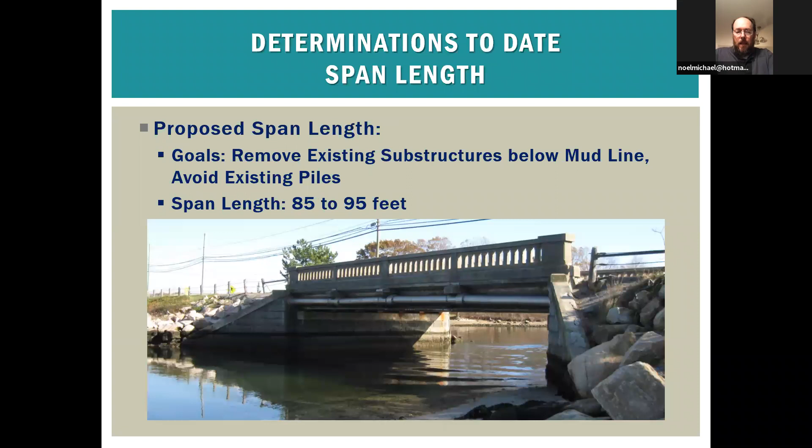So far we've determined the span length of the bridge. We said we want to remove the entire existing bridge down below the mud line, and to span over that, it's going to take a span of about 85 to 95 feet.

Just to rehash why we want to span over that whole existing bridge - down below the abutment, what you can't see is a field of wood piles, timber piles, basically like telephone poles that were driven into the ground to support this bridge when it was constructed. Those are probably still intact and in good shape down below the mud line, and would make it very difficult for us to build our proposed substructures through that.

So we're going to build behind the existing abutments - we'll cut those off and remove the existing abutments in their entirety. Those will be buried below the mud line, and you'll never see them again.

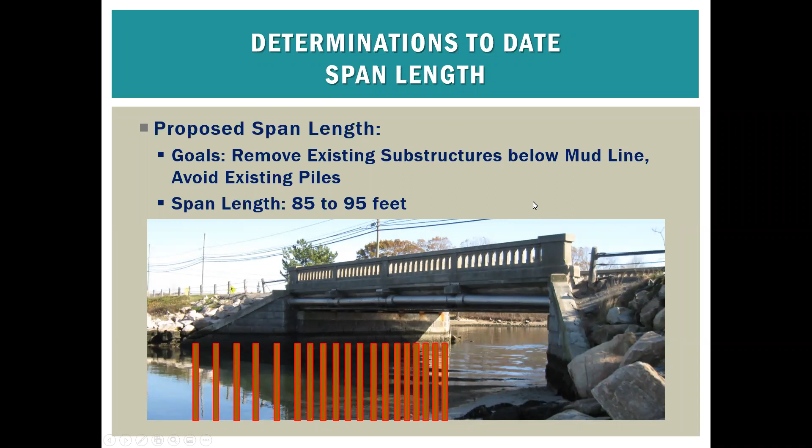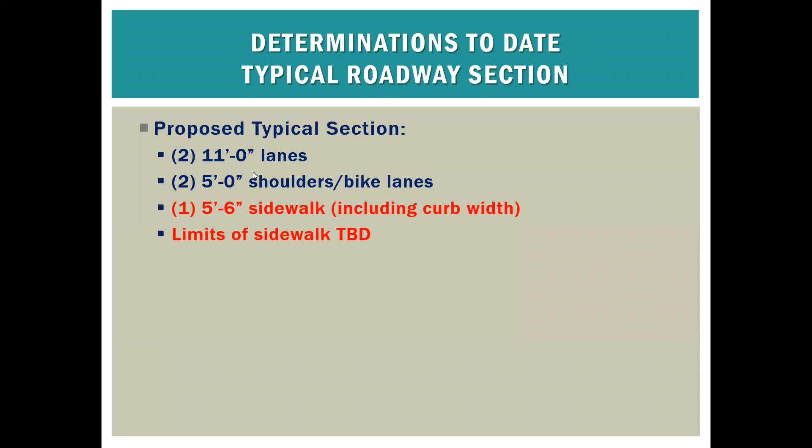For the profile, we have the goal of achieving 1 foot of freeboard at the 100-year flood, which is basically keeping the roadway dry at the 100-year flood. As we discussed during the last meeting, that does require a fair amount of fill along the causeway.

We talked about the properties most impacted by that fill, especially 991 and 981 Groton Long Point Road, where the fill approaches 3 feet. So it's a substantial impact to those property owners.

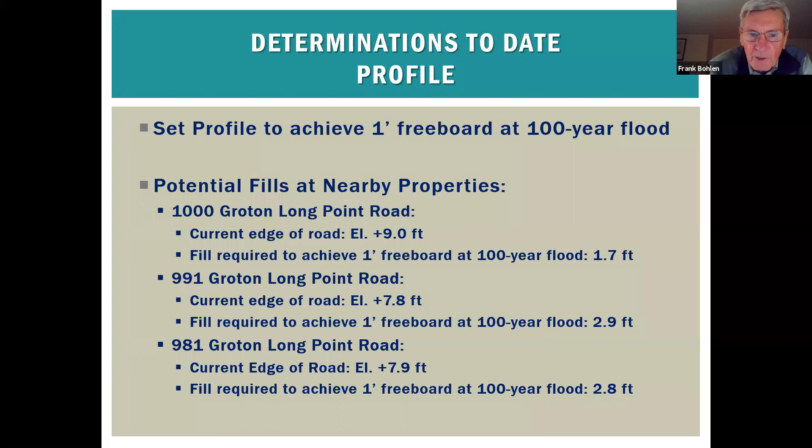Okay, now wait a minute, just give me a chance to read it. Sure. So if we go at 1,000 Groton Long Point, which way are we going? 1,000 is to the west. Let me go into the internet here for a minute. Are you still seeing my screen? Yeah, I see it. So 1,000 Groton Long Point is the first property to the southwest here, and 991 and 981 are the closest properties to the northwest.

Good, so let's take a look back at that other slide. So at 1,000, you've got a current edge of road elevation of about 9 feet, and you're going to go up a foot, 1.7, right? And you're going up 3 feet at 991, which is the red roof house. And then about 3 feet at the next one. So you're coming up 3 feet, 3 feet, and 2 feet. Okay, good, thanks.

So we've already kind of gone through this - these are the impacts without a sidewalk in front of these residences.

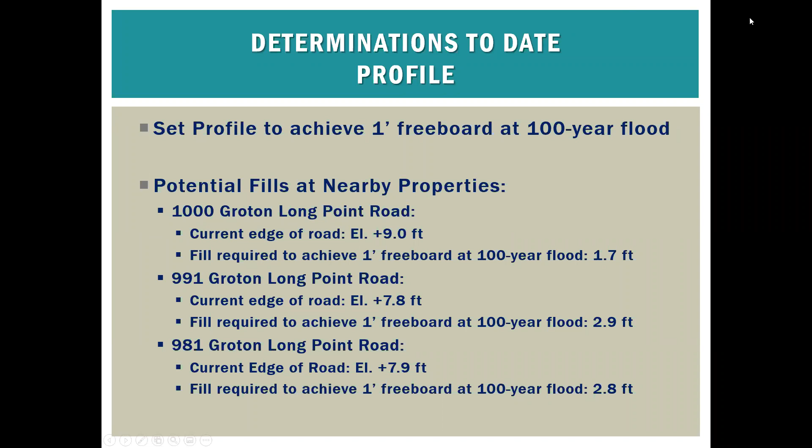So getting into the sidewalk - as Greg and I discussed, this meeting will be a little different tonight. We're intending this to be an open forum and a brainstorming session for what we would hope to get out of the sidewalk.

First I want to hear who is in favor of having a sidewalk or incorporating a sidewalk in the project, and then what those individuals would like to get out of the sidewalk - whether it's connectivity from one point to another, is it to get to the bridge for a viewpoint, or are there other reasons to have the sidewalk?

And then where would the sidewalk go - north side, south side? If right of way was not an issue, what would be the ideal location for the sidewalk? What would the eastern and western limits be? And then after this, we'll talk about what the right of way implications are.

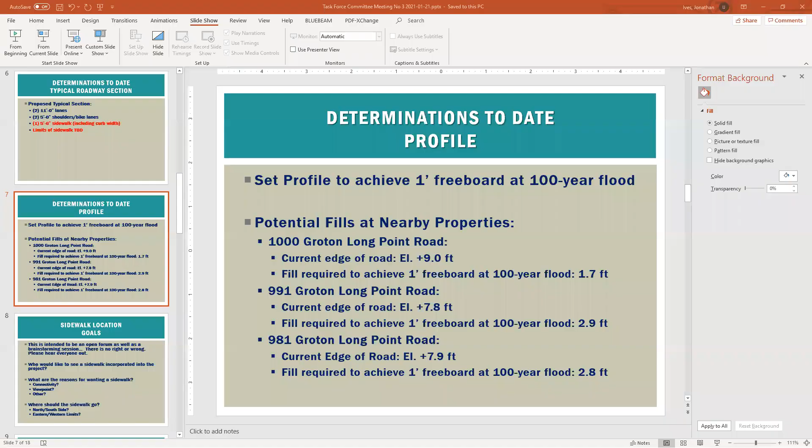Would anyone like to offer an opinion on that? Now, I can go back to the aerial view. This is just the town GIS website. We also have Google at our disposal here.

Are there sidewalks on Groton Long Point Road, on East Shore Avenue? There's a sidewalk along the west side of East Shore Ave. That was on the east side, John. Or is it the west side? West side, the far side of East Shore Ave has the sidewalk. You're right.

I think it'd be a great idea to have the sidewalk right from that corner all the way headed east to Esker Point. That's on the south side of the road. It's the only thing that makes sense if you're gonna have a sidewalk. Yeah, that'd be great for access for everybody.

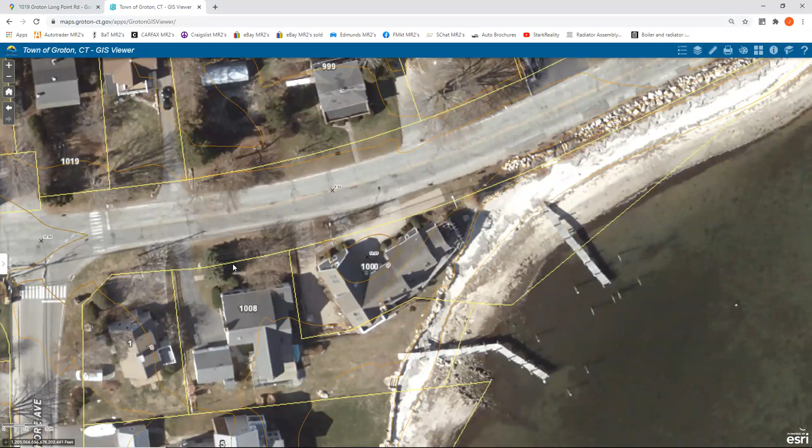Are there any sidewalks on the fisherman side currently? No, no. So the sidewalks stop well before the bridge currently. There is no sidewalk on the east side or the west side. There are no sidewalks along Groton Long Point Road. That's right.

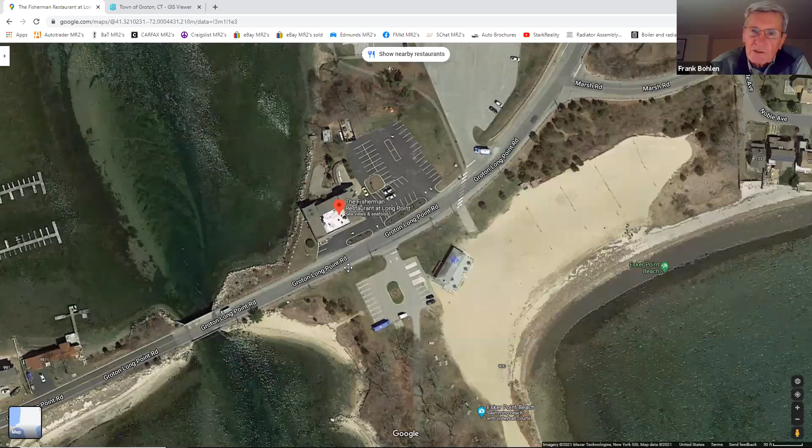And where do they stop? At the Esker Point parking entrance? There are no sidewalks. Well, there are sidewalks up the road. They just stop near 215, or they stop at the entrance to Esker Point Beach currently, correct? No. They walk on shoulders.

So the placing of a bridge could have a sidewalk built in that area, which doesn't have any existing sidewalks. Yeah, it was built with the potential to add a sidewalk on either side, but there is no concrete or paved sidewalk there now.

So as you head toward Groton Long Point, there's a crosswalk from the parking lot over to the beach, but no sidewalk on either side of the road. And then as you continue along Groton Long Point Road, past the restaurant and over the bridge toward Groton Long Point, we have very narrow shoulders now and no sidewalk. So there's no sidewalk until you get to this East Shore Ave.

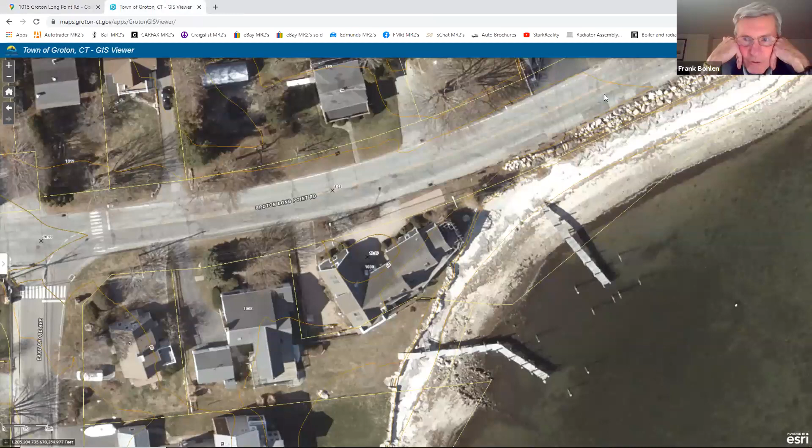You're proposing two 11-foot lanes and two 5-foot shoulders. Yes, so you've got 22, 32 of blacktop, more or less. And what does that look like? That's wider than this guy right now, right? I could look, I measured it, but it's a little bit wider than the existing bridge.

Okay, so I guess two things. If you're talking about a sidewalk, width is what? Another 6 feet? It's about 6 feet. Yeah. Well, we have to think about it going 6 feet into the adjoining property somewhere in there.

But what are the cost implications? Cost implications are, basically, I'd look at it as square foot cost. As you increase width, you're increasing cost approximately proportionately, as you're building out the causeway. Could be even more, I'm thinking about the sidewalk now. If I didn't do the sidewalk, am I $1 million to the good, $500,000 to the good?

Okay, so we've heard that there's some interest in having the sidewalk along the south edge of the road. We know there is going to be some cost implication if we do that. I will offer up that we have received feedback from the property owner at 1000 Groton Long Point Road, who is not in favor of having a sidewalk along the front of his property - just to get that out there.

What about, did you ask him about roadway elevation? We haven't engaged the property owners to date, but this property owner reached out with some feedback. I think his thought was that all along 215, or the main road there, the highway or the path that you showed earlier was on the other side of the road, so why would we change it to that side? I think that was his train of thought.

Yeah, I think it totally makes sense to have it on the south side, and I don't think the opinion of one homeowner - it's not like we're going to have it on his property - I don't see why that would matter. He may not be there year round to keep it snow clear or something, huh? Yeah, well...

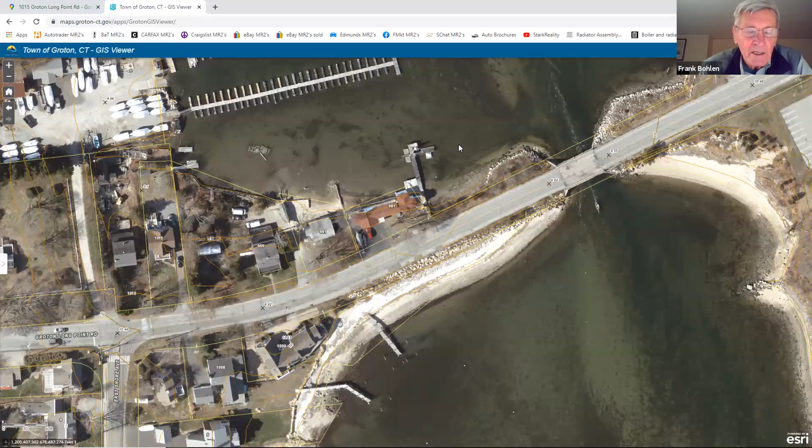Yeah, otherwise you're going to need a boat. Exactly. Well, it does. It's a public safety issue for sure. If that is even on the table, one thought I had was for the owner at 1,000 - he's concerned about some liability on the sidewalk, and we're joking about cleaning the snow, but that's really then taken care of because it's in Groton Long Point Association's hands.

That's correct. The land in front of those three houses, certainly, I don't think there's any dispute that that's Groton Long Point land. And if there was a sidewalk there, Groton Long Point would support that sidewalk because it's on Groton Long Point land - Groton Long Point would be responsible for that as part of its domain, handling of the sidewalks. Right.

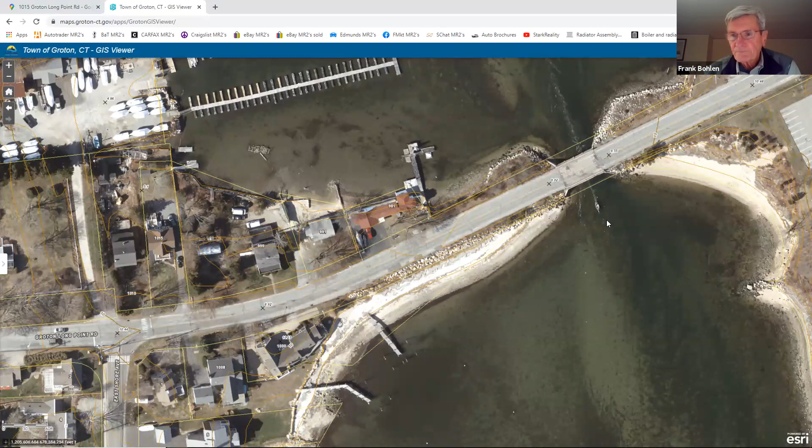Interesting. Okay, is there any counterpoint to discuss then? And are there any opinions otherwise as to what the preferred extents of the sidewalk would be?

So do most people agree that it should be on the south side? Yes. Okay. Do most people agree that it should go from Esker Point to East Shore Avenue? Yeah, if you're going to build it. Okay, all right, well that's good.

What about - this is David - I just want to make it clear that I'm not in agreement with that. I would need to get the support of members of the Groton Long Point Association for those matters, anything beyond the bridge.

That actually brings a good question to mind. If there was an interest in having the sidewalk run from Groton Point out through the Groton Long Point Association area, say East Shore Ave, out to the bridge, why would it not continue beyond that? What would be the point of having the sidewalk out to the bridge where it stops at the bridge?

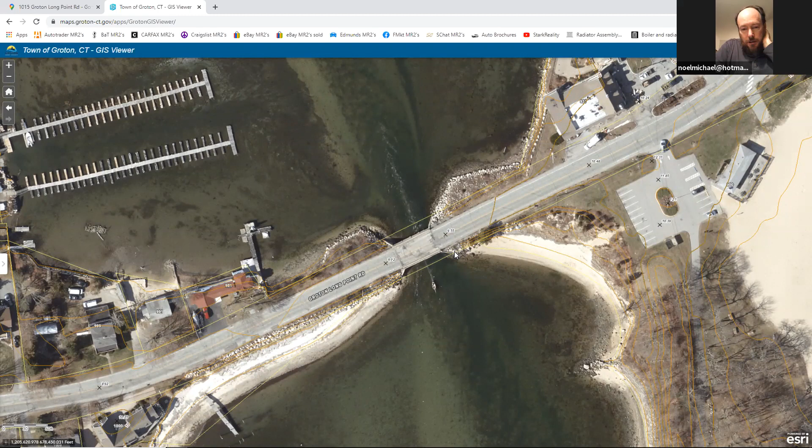Well, that was going to be one of my questions as well - why are we building a sidewalk with nowhere to get to that sidewalk? Right, so what is the basic reason for the sidewalk? Is it to connect the beach?

Hey, if any of you guys go down there at all during the day, there are hundreds of people that walk along that road with like a 2-foot shoulder on the north side. There's a lot of people that walk on that, and we definitely need a sidewalk. And we run into them on the bikes. Absolutely, oh yeah, they're there regularly.

Are you referring to a sidewalk from 215 to the bridge? That area where there's no sidewalk currently? No, the whole length all the way to East Shore. Understand, but I think the question was, what's the plan for the sidewalk from 215 to the bridge? Or is this, because it sounds like we're just addressing or discussing from the bridge to Groton Point?

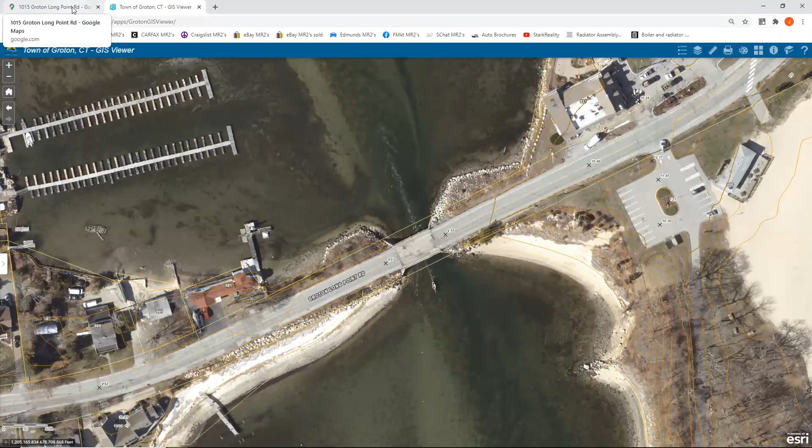I think it should go from the parking lot at Esker Point Beach all the way across the bridge to Eastern Point, to East Shore Ave. No. And what would be the cost of that?

That's what I asked. And what would be the cost? Around $1 million. We're offering that up as being in the ballpark. That's just a guess, right? Right, yeah.

Could be less. And with the overall scope of the bridge, if the town's only paying 20%, I think it's a worthwhile investment.

Can we get some formal guidance on that? Because in my past, I've found that extensions of a project are not deemed as the same reimbursable rate as the initial project. So I would want to make sure that this group, as well as any future group, confirms that the sidewalk we're discussing from the parking area to the bridge is 80%, as well as beyond the bridge in Groton Long Point is 80% reimbursable as well.

Yes, we can consult with the federal local bridge program and confirm the eligibility of that. In my experience, generally, as long as something like a sidewalk matches your roadway limits, it would be considered eligible for funding. But we can certainly confirm that. That'd be good to have for next meeting.

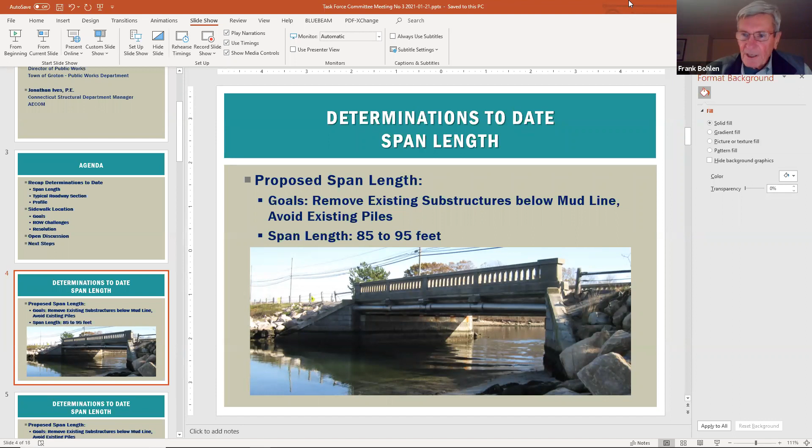Could there be grading done under the project, I guess? Yeah, well, I think I recall that conversation. I think it more had to do with what you were talking about in terms of the pile structure. We heard tonight that they're going to be building outside that pile structure, right and left of it, and cutting that pile structure off at the mud line, the existing mud line. That would complicate the dredging in there anyway. But the problem isn't in the channel—there's plenty of water under the bridge. The under-bridge water depths are fine. It's to the north and south that you get into trouble.

I think you can actually kind of see that in the aerial. There's so much water coming through this opening here. If you go out there when the tides are coming in or going out, that water is really rushing through there—it's moving now. There's probably also some sediment buildup outside of that. Yeah, typical.

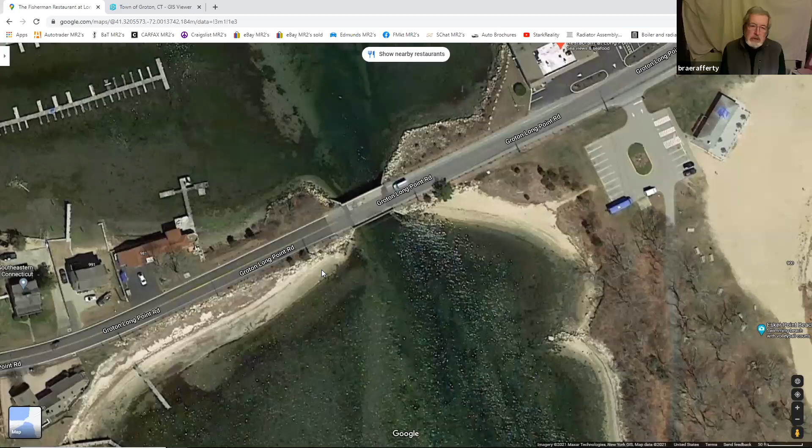Thank you. What about the riprap along the intertidal zone coming up to the road structure? Is that just going to be added to, or is all that going to be removed and new material brought in? Our hydraulic engineer has a designed riprap section that's shown in the earlier studies. It includes a specific size of riprap needed based on the wave heights shown in the FEMA studies.

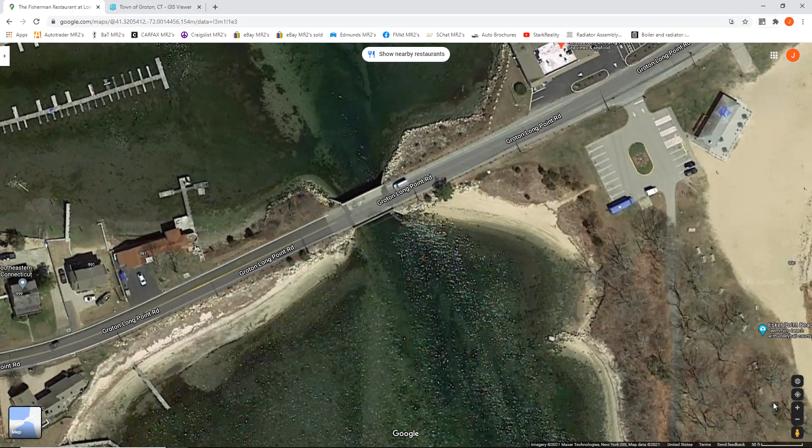Would you remove what's out there? I think some of that depends on the roadway and sidewalk limits. If we're building out the south edge of road to incorporate that sidewalk, you are kind of pushing that south a little bit. If you look at the street view, you get an idea—as you get close to the bridge, the south edge is steep and kind of hugs the south edge of road.

We're talking about building a sidewalk south of this, so yeah, we are pushing that toward the sound. Anything else?

Nothing here. Okay, so let's see. All right. So moving forward, I think we're ready to move into design.

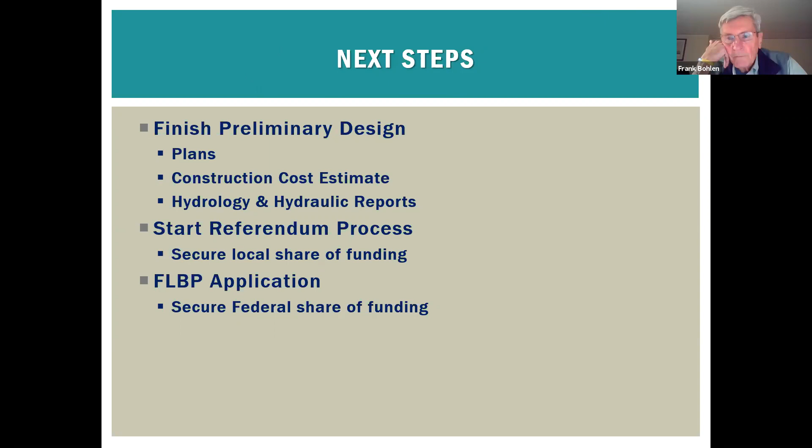Okay, are there any utilities across that bridge, water or sewer? There are. Sewer is on the north side of the bridge—it goes underneath the water. That's correct. We have a backup water supply going over the bridge. The water line is on the north side of the bridge; it hangs off the bridge. You can't see it in the photo, but it's outside of the bridge structure, just kind of tucked under.

Sewer goes around the bridge—there's a siphon under the channel. Sewer generally runs down the middle of the road, but it skirts around the outside of the bridge to the north.

And you have the utilities along the south, the overhead utilities along the south edge of road. What was that pipe hanging on the south side of the bridge? It was on the north side. I thought there was one shown on the south side in the picture. Let me look back at the original slide, the photo... right there, there it is. I think that's the north side of the bridge. Oh, okay, you're right. That is the north side. See the telephone poles.

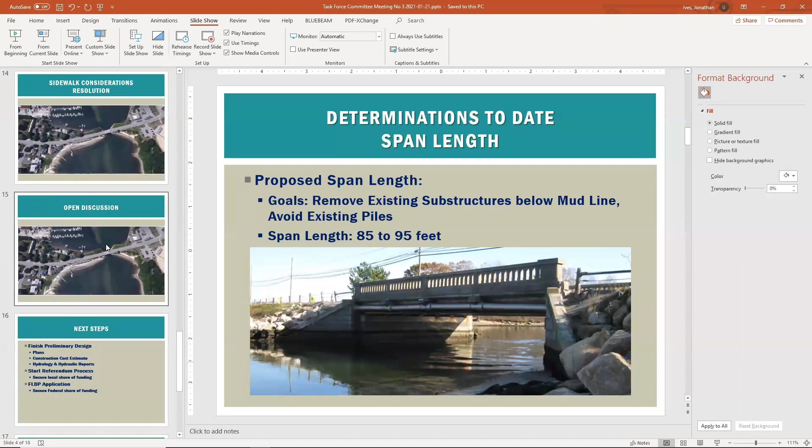So do we intend to meet again next month? And what would we like to discuss at that point? I'd like to hear, I hope over the next month you can really get together with the owners.

And that picture got a little more complicated when I heard this story about Groton Long Point tonight. But the landowners on either side of 1099 and 991, about the effects of the roadway increase in elevation, I think we heard last time that that was a potential thorn. You could get into some litigation over takings and costs over takings. And we'd certainly like to have that resolved.

And I know we've discussed the three property owners. There's no issue with the other property owners near there, no concern for them, correct? Well, we discussed the ones most impacted in our meetings here, which are closest to the bridge. But everyone, I guess, is impacted to some extent through the project. I guess I'm just wondering if we're going to reach out to those three, does it make sense to reach out to the other two or four, since they may want to be informed as well? Absolutely.

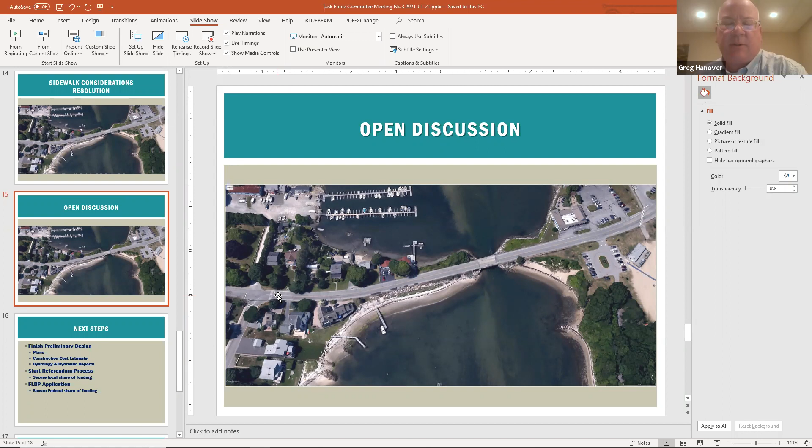Okay John, you and I can get together and see what you can get for me that we can send or meet with these folks, to get some preliminary feedback. And that will take some design development, so we'll work together on a time frame for that, whether we meet a month from now or whether we push it so we can get some further design development and have a chance to talk to those people. It may make sense to push that out just a little bit.

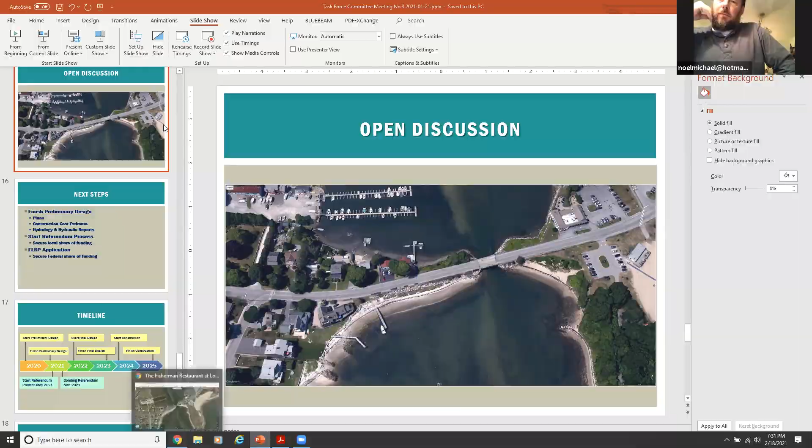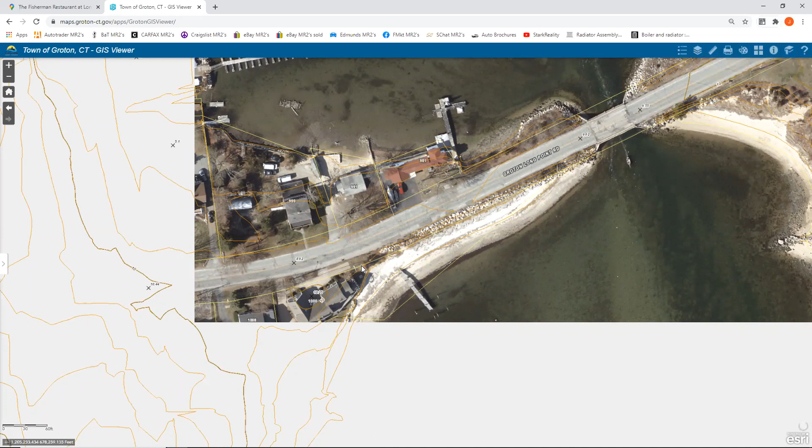Hey, are there currently markings that show where the roadway ends on these adjacent property owners' property? If somebody really can't complain too much about a sidewalk if it's not on their property, I wouldn't think. Well, everyone has access to the town GIS website. Oh yeah, that's true. There are property lines and street lines shown on that website, so you don't even really need engineering plans to understand that. The issue is much more elevation - you can't see from this the limits of grading from the proposed project.

Yeah, that's the biggest impact we've talked about. Isn't Fort Hill something like 14%, Greg? No, it's only 9%. You said 20%, John. Yeah, it's very steep there to make that grade increase happen. And it may be too much. It certainly is feasible to incorporate some improvement.

That was our target, to have that foot of freeboard for the 100-year flood. But again, I think people are really hung up on the 100-year flood because they think if this is something that happens once every 100 years, chances are it's not going to happen in my lifetime. That's not really the case. The 100-year flood has a 1% chance of happening every year. And the 50-year flood here is substantially lower, and that's a 2% chance that flood happens every year. So there is a substantial cost associated with raising the roadway above the 100-year flood level.

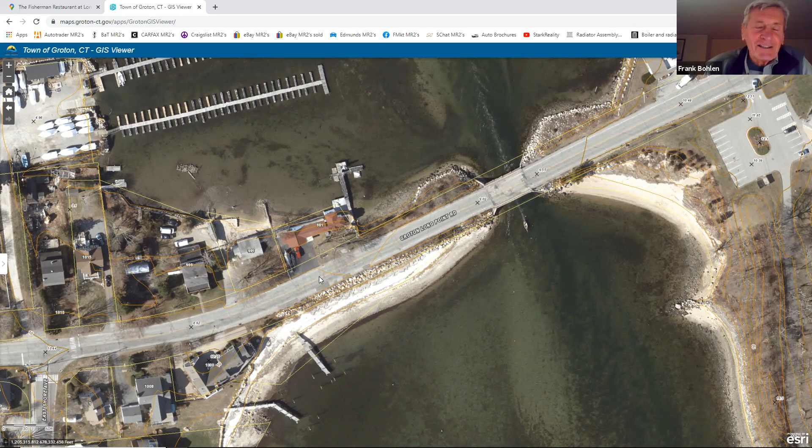Yeah, let's explore the issue. I think you have the thing in front of you, because we could get into some discussions of that. Someone might argue - now mind you, I'm coming from a resilience standpoint, so understand how kind this is - it doesn't make any sense at all to raise the bridge to the 100-year flood level, because at that point, Groton Long Point is going to be gone.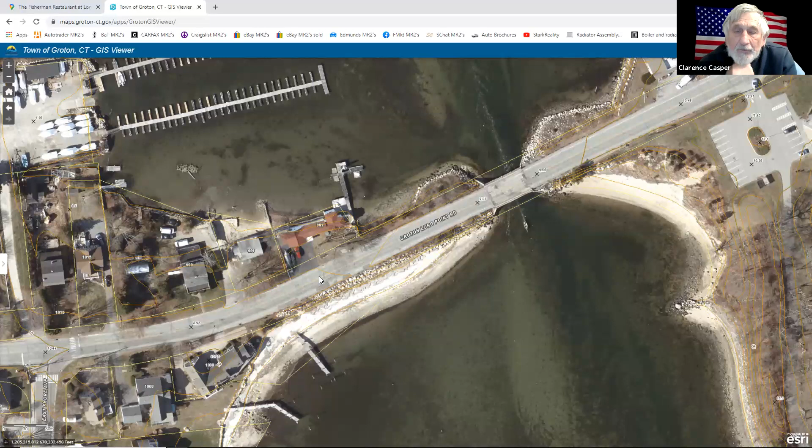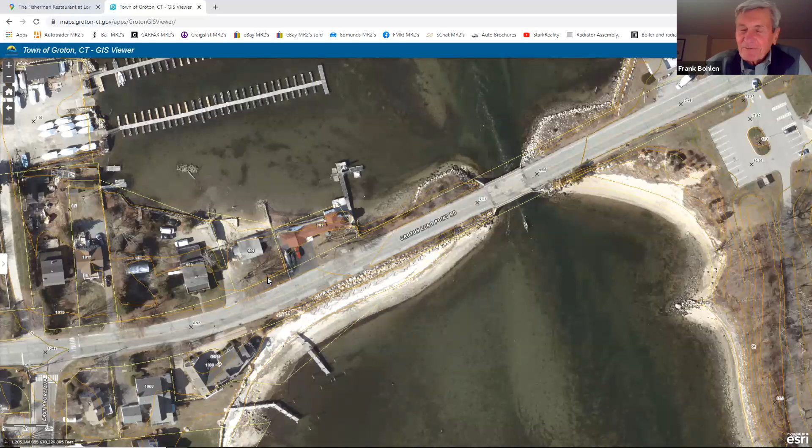But we may have to, when we start looking at some of these taking issues, we may have to look a little harder at the absolute resilience. Much as I don't like to say that.

I have a question about the hydraulic study. Last time, I think you guys were talking to Milone & MacBroom about doing some hydraulic work. They are on board to do that, and they have the go-ahead to start their work. There's some work they can do before we make all the decisions about the layout of the roadway and the profile. They have to prepare hydrologic studies, and they have to go ahead and do that now. So we're going to get them going so that these things are moving in parallel, and we're not coming to a stopping point where we're waiting to get information from them to finish the design.

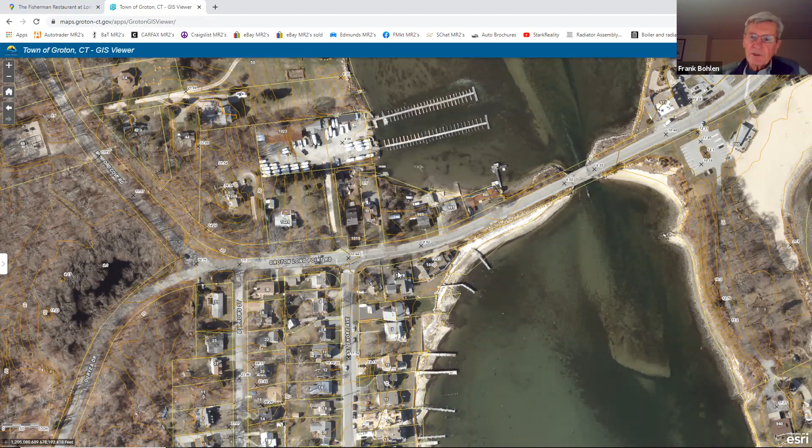Keep in mind, if it's only 20%, we might not go out to bond for that. We might pay it out of fund balance. But we'll have to discuss with finance. That fund balance. Deficit spending.

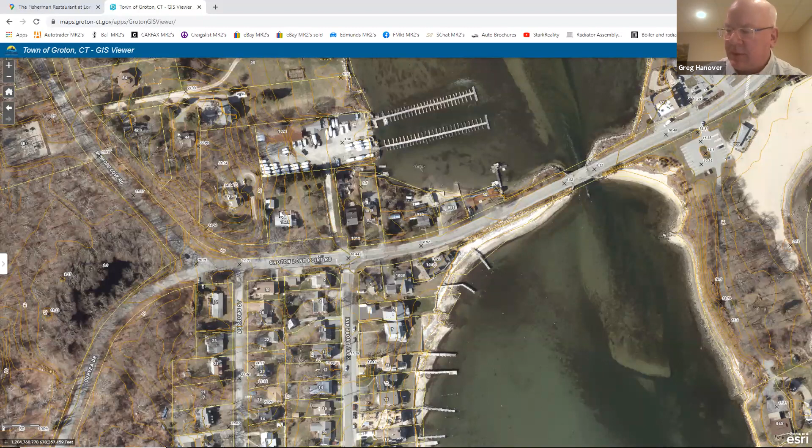So John, at what point do we put in for the federal bridge application? I saw you had that on your last slide there. Yes. I think we wanted to have a handle on what the targets were for the profile and what we wanted to do for the typical section and the sidewalk, and I think we do have a better handle on that now. What we hoped to do was get through some preliminary design where we had a better handle on the cost. You don't have to have an exact cost to put in an application for funding. So we could have that as a target to get a funding application in with a preliminary layout and a preliminary cost.

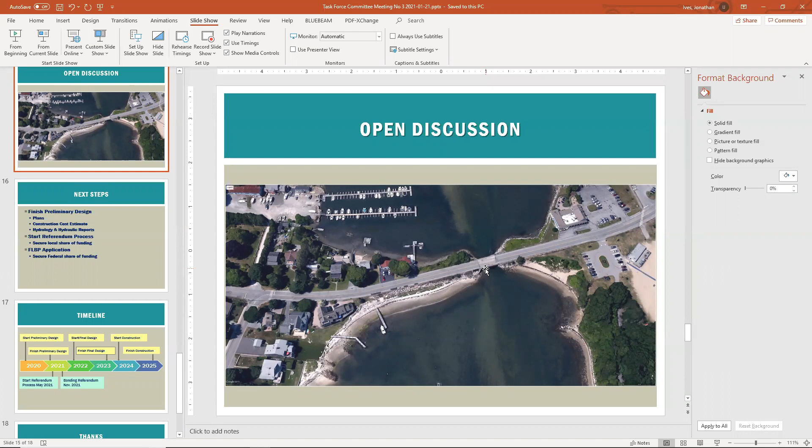In the next couple months, as we had in the timeline here, some heavy preliminary design once we had these layout issues sorted out, which is going to have to be done in parallel with talking to these property owners.

All right, anybody else have any other questions, comments, things you want to talk about? Looks like maybe we might meet in a couple months, might make more sense. Is that what I'm hearing, John? Yeah, I know we want to keep things moving. We want to have some progress on the design side so we have something substantial to show the property owners, and that's going to take a little bit of time on our end. To me, two months would be fair to knock all that out, as well as have some time to discuss with them.